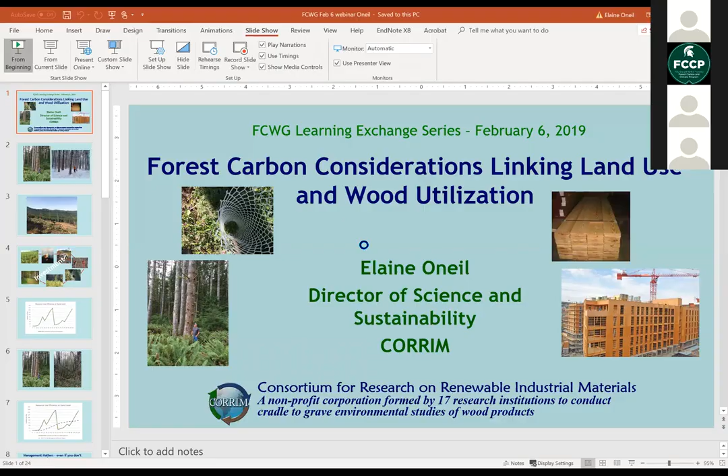Thanks, Lauren, for that introduction. Because I'm on a time limit, I'm going to move directly into the conversation about forest carbon considerations, looking predominantly at the land use forum, which is my area of expertise. I'm going to start with a look at private forest timberland.

Let's look at what it takes to grow a forest and keep it as a forest. I find hardly anyone who doesn't like the forest at this stage. We all love our trees, and we love that they're actively sequestering carbon at this point, maybe less so in the winter picture than the summer one because it's cold outside, which most everyone in the country can agree with. That was me, by the way.

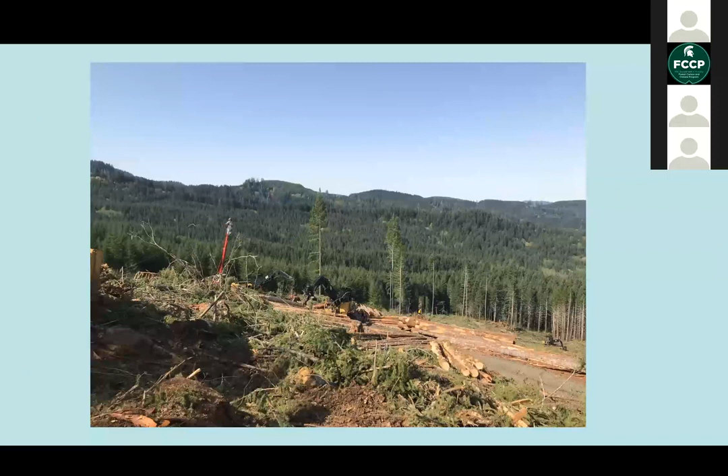Now, except for the landowner, hardly anyone loves the harvest stage, which takes place once every 25 to 50 years over a 2 to 3 week period. I think we tend to forget that what ensures all those trees can continue to grow and sequester carbon is the opportunity for profit and reinvestment.

The investment is not inconsequential, from sowing those seedlings, doing the site prep, planting and protection, to managing that forest for 25 to 50 years. There's a tremendous amount of money, time, and labor involved in regenerating forests and protecting them from all sorts of hazards. Take the example of small forest landowners, the Townsends, putting elk browse protectors on every one of their seedlings and rechecking and replacing them every year until that stand is above browse height.

They don't like this, but I like to call it the diaper phase. It seems to fit because it's a labor of love with high uncertainty regarding returns. Then there's a long wait, sometimes until the next generation inherits their land.

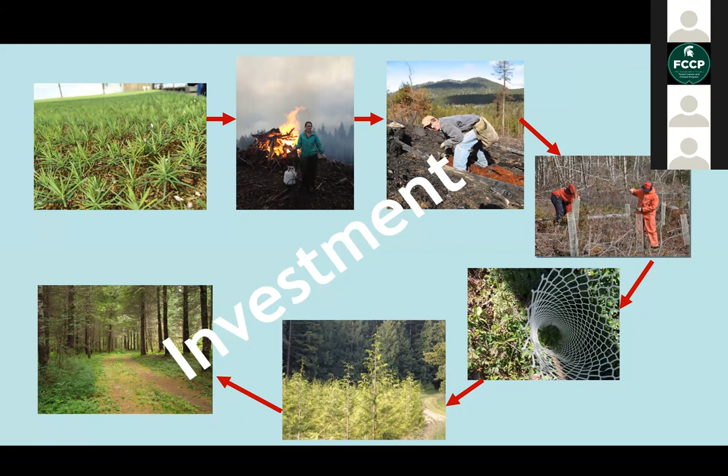Barring a whole host of potential natural disasters, that kind of investment will generally lead to a well-stocked forest stand that can sequester a substantial amount of carbon while it is growing to maturity for the next harvest.

That kind of growth you can see here in carbon in tons per hectare. This just looks at the forest component, not the soils and understory. Once you plant that forest, you start sequestering carbon, and at age 50, in this example for the Pacific Northwest, you're harvesting and then planting a new crop again. That little blip at year 25 is when you're doing a commercial thin to improve the quality of the stand.

So this is 0 to 100 years on the X axis, and carbon in tons per hectare is 0 to 180 on the Y axis. At about 50 years, there are about 160 tons per hectare of carbon sequestered in the trees in that particular stand.

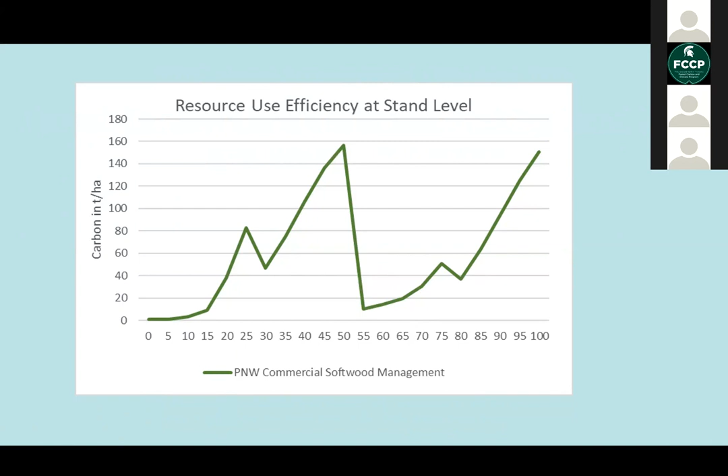The second alternative does not make good use of the site, so from a resource use efficiency standpoint, it's not necessarily a good alternative, but it is the alternative when there isn't that opportunity for investment and recovery of investment through harvest.

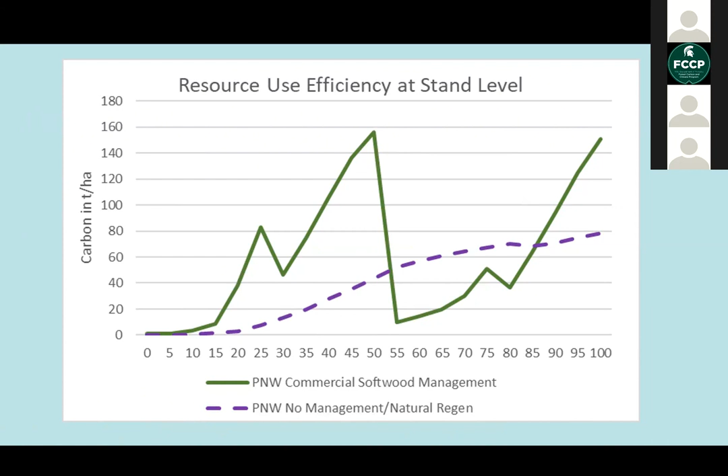Because tree volume is directly correlated to carbon sequestration, the acre that you don't manage doesn't sequester as much carbon either, and it doesn't do it as quickly. That's shown by the comparison of the Pacific Northwest no-management natural regeneration alternative, which you should be able to see as a dotted purple line. There's a substantial difference in the ability for forests to sequester carbon under management versus no management.

In fact, even if the forest is never harvested, failing to invest has significant long-term consequences on the amount of potential carbon that can be sequestered per acre, as noted on the 3 solid lines on the chart here. The black line at the top—my cursor is following that black line—is the managed forest, no-harvest alternative, which would be more akin to that picture of the large Douglas fir.

An unmanaged forest, if you do nothing, you might get regeneration here in the Pacific Northwest—not in all regions, but here you can get regeneration—though it will take quite a bit longer and won't necessarily be as productive. I would say that alder stand is more like this bottom gold line because it's not a fully stocked forest.

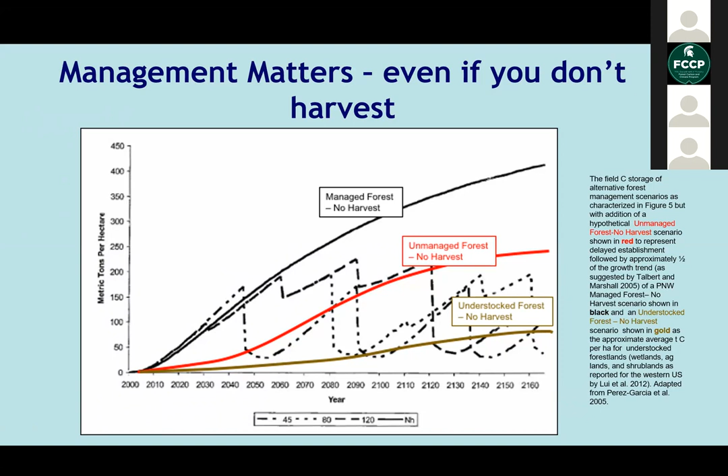Now, these lines represent the average of a number of different references that we've looked at for these comparisons. The first two were modeled within the work that we do.

Now, in terms of management and investment, how big can that difference be? This one, we're changing regions. We're going to the southeast, US Southeast pine plantations.

On that bottom, I found this particularly stunning. In 1940, the annualized yield measured in dry tons per hectare per year on the y-axis was about 1 dry ton per hectare per year. That was just a natural stand. With planting and then the advent of site preparation, fertilization, weed control, and tree improvement, and now they're in that clonal biotech area, you're looking at 13 times more yield, which means 13 times more carbon sequestration.

And then at the same period of time, you have the rotation age dropping dramatically from 50 years to about 18 years. That's that black line flowing down from the left to the right.

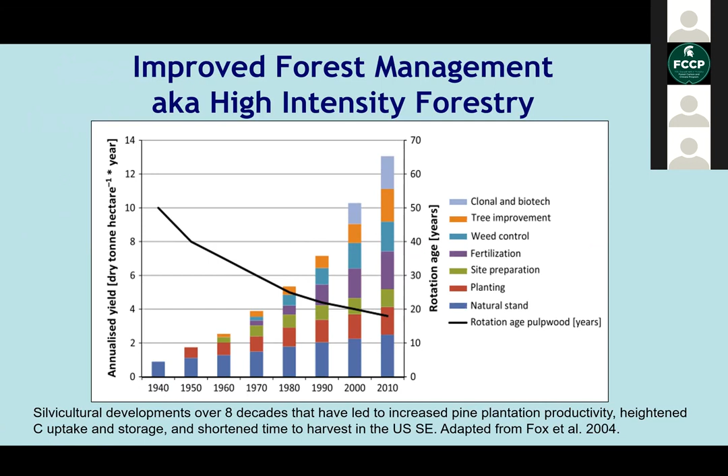Clearly, with investment, we can grow trees bigger, faster, and better, but that investment does come with the expectation of harvest. Now, this is also in the southeast, and now that we have 2017 RPA data, we'll probably update this one.

With that increase in investment, what we've found is that not only is there an increase in efficiency per acre, but also an increase in acres in production.

So what we're seeing is that the land is sustaining its carbon, the carbon volume on the land, while we're continuously removing carbon and putting in for other uses, whether long-lived products or pulp, or currently pulp pellets.

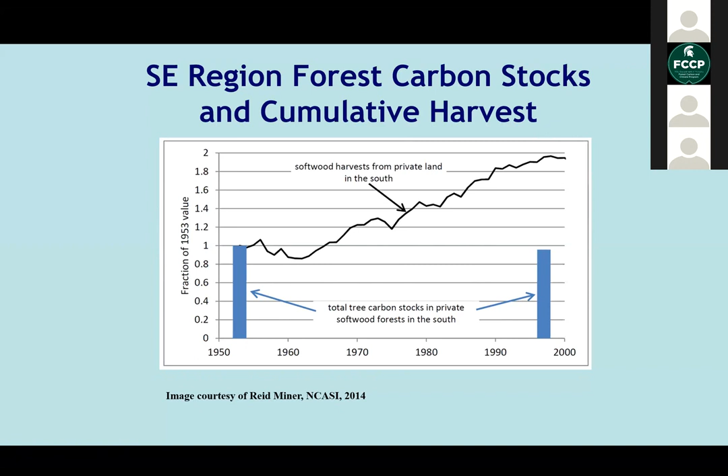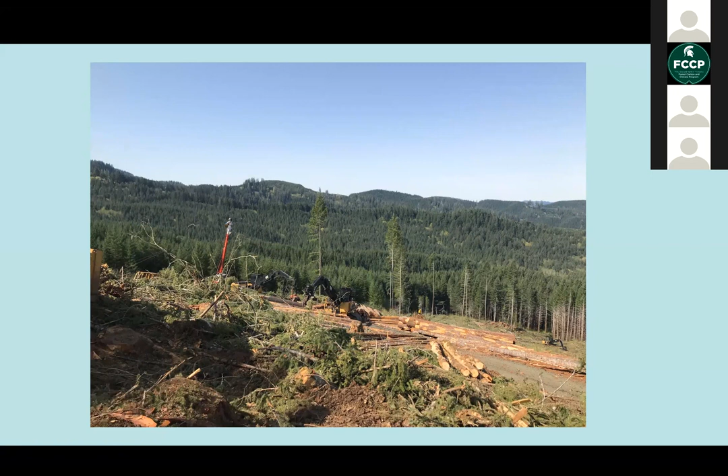Now, I want to go back to that clear cut for a minute, and I want you to look beyond it to the forest land behind it. That particular forest land is all owned by the same landowner that's doing the harvest. There is a myth of the carbon debt that arises because in this harvest scenario, we only look at the clear cut and forget that the land behind it is part of the package deal.

So that example where I talked about the Townsends, they have about, I want to say, 300 acres. And they have a long-term management plan. They know exactly what they're going to do and when they're going to do it. They probably look like the little squiggle, but they're not the only supply to a mill.

And when you want to maintain a milling infrastructure, you basically need that flat line of supply, which means you don't have a carbon debt.

If you're not managing sustainably, then you tend to lose your markets, because there's no way for those mills to continue to operate without a stable supply.

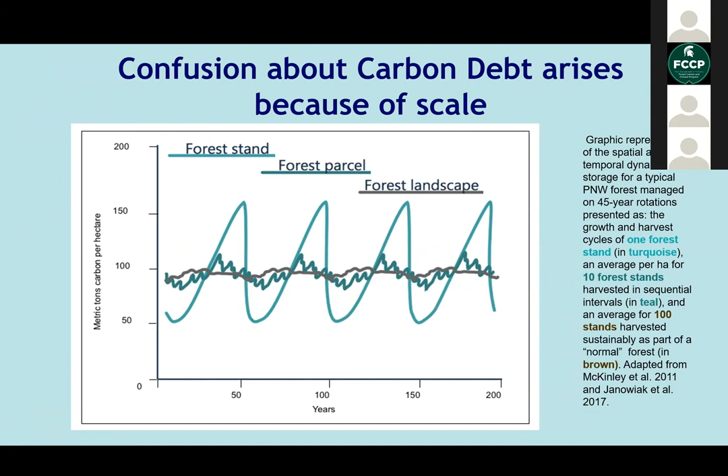When supply dries up, as it has in the western U.S. where the forests are predominantly federal lands, the infrastructure disappears and the opportunity to invest on remaining lands goes with it. And that's been a real unfortunate consequence in the past just about 2.5 decades.

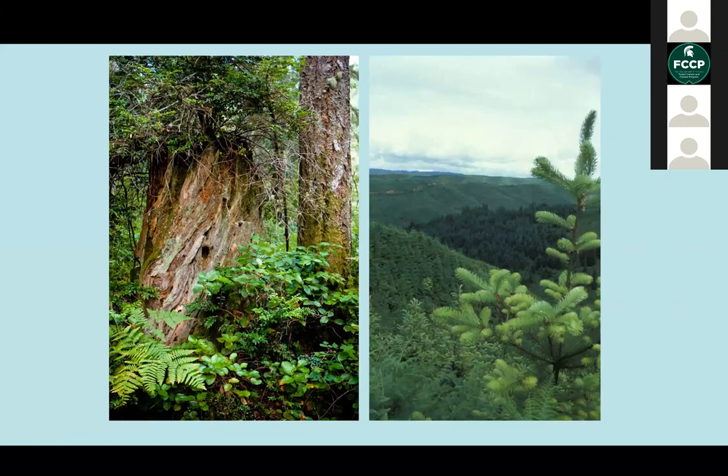This leads to a brief discussion on the difference between old forests and young forests in terms of carbon sequestration. These are a couple of my favorite pictures. I love both of those forests, but they have different consequences when we're talking about forest carbon and how we want to use forest carbon as a mitigation for climate impacts.

In terms of resource use efficiency, if that was the only thing we were measuring, and I'm not saying it is for national forests since they have lots of other purposes for being, but in terms of resource use efficiency, we could say this is not an efficient mechanism for maximizing carbon sequestration from the atmosphere.

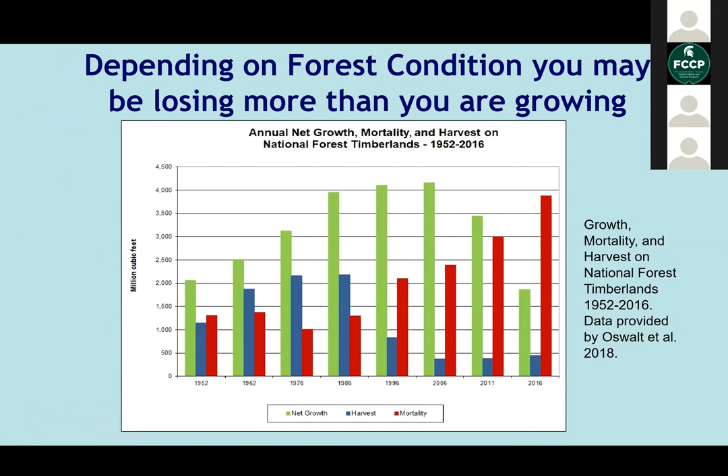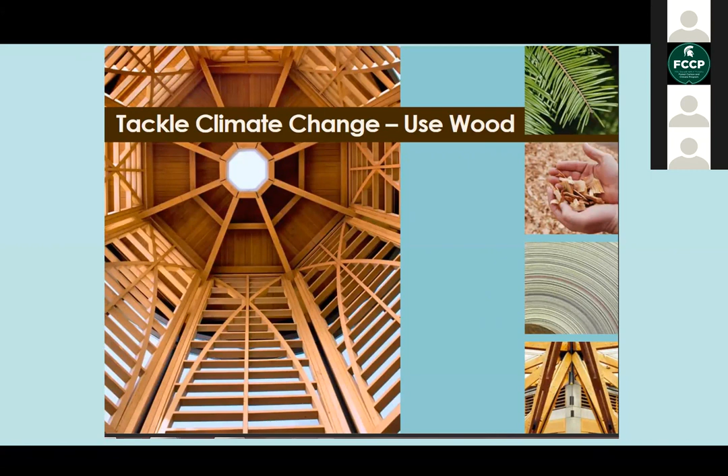We've tracked everything from the time we germinate the seedling and put it in the ground, and we grow it and harvest it and take it to the mill and divvy it up into all these products, and then we start looking at alternatives. A lot of that work has been done, so we have a pretty good idea of where the pluses and minuses are.

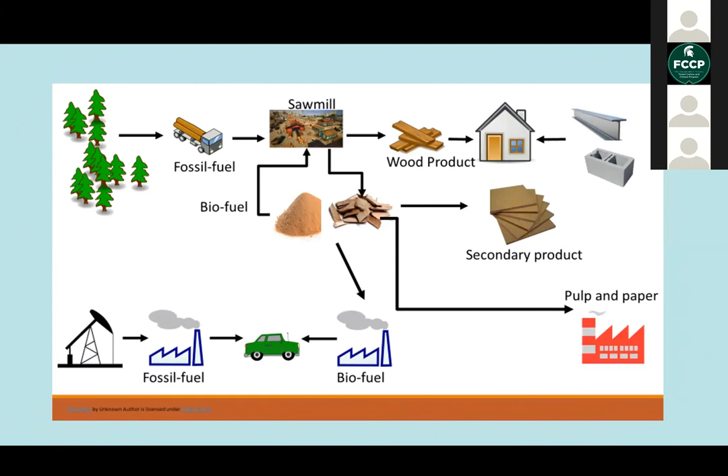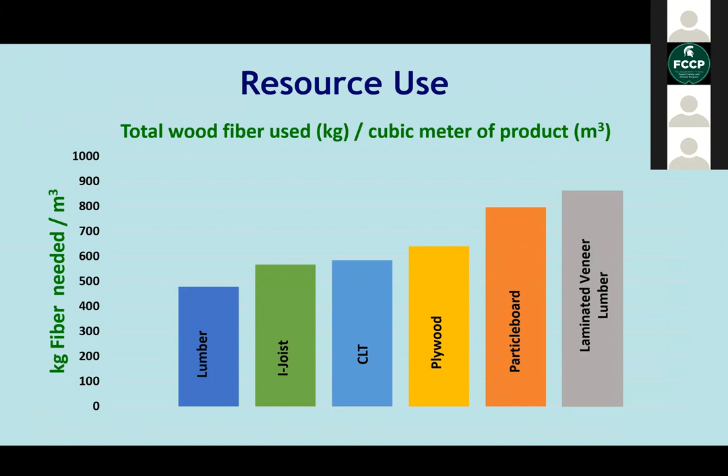Now, I'd say those comparisons are somewhat useful for us academics, and they meet the requirements for LCA because you have to put it on some kind of unit, but they're not as useful as comparing resource use efficiency on what we're calling a functional unit. In this case, our functional unit is a square meter of wall assembly. A square meter of wall serves a function just like a square meter of floor.

Now, if you were noticing in that last chart, there's a bit of jostling around in terms of resource use efficiency per functional unit. You got kilograms of wood fiber per square meter of wall. If you use a steel stud plus plywood, the wood fiber used per square meter is just the plywood. If you have a wood stud plus plywood, you have more fiber used. And if you have CLT, you have an enormous amount of fiber used. So we've come to the conclusion CLT is not a very efficient way to build a wall if you're considering wood fiber used as a resource use efficiency metric.

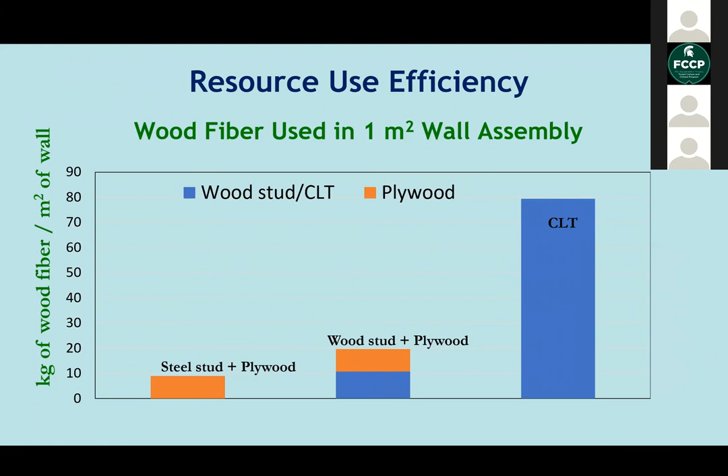But on the flip side, because it's not very efficient from a resource use efficiency standpoint, it does store a tremendous amount of carbon relative to other alternatives. Here it's compared lumber to steel to concrete block to CLT, again looking at carbon stored in that wall.

So if part of your goal as a builder is to have a building that serves as a large carbon sink, then something like cross-laminated timber or other mass timber products have some significant pluses over conventional construction.

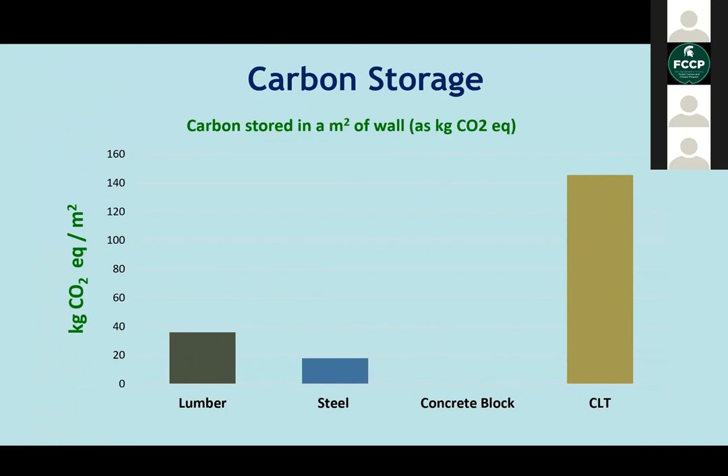And finally, I want to say where mass timber really shines in terms of carbon footprint is when it can replace something like a reinforced concrete wall, because on a net basis it stores carbon emissions rather than releasing them. That's shown in this particular chart, where zero would be a net zero building where you're neither emitting nor storing any carbon dioxide in that square meter of wall. Everything to the negative side is actually storing more carbon dioxide than emitted in the production of it, and everything to the right is emitting more carbon dioxide than is stored in the final product.

This is just one example of a comparative analysis. It builds step by step from the point of the seedling until the wood product enters the building as part of a wall.

I would say that many more of these kinds of comparative analysis are needed, not just on the functional unit basis, but on the whole building basis, so that we can find the highest leverage for what is essentially a scarce natural resource, sustainably produced wood. And with that, I wanted to pass this on to George, because I think he has the other part of this story that I'm very much looking forward to hearing.

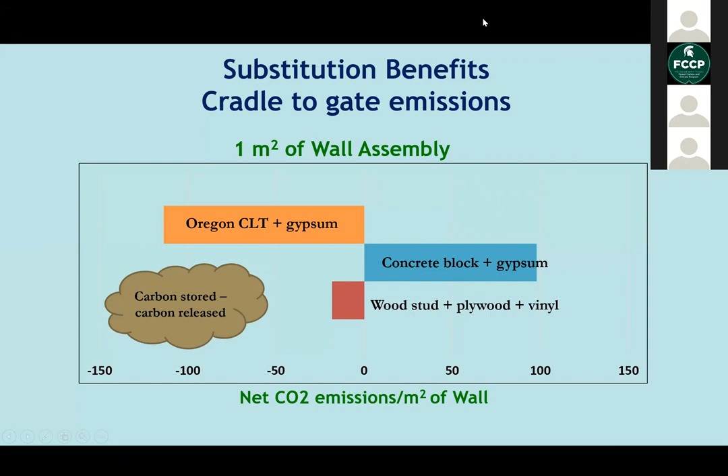Yep, I just need to, oh, there we go, sorry. I thought I had to get screen sharing given to me. I apologize.

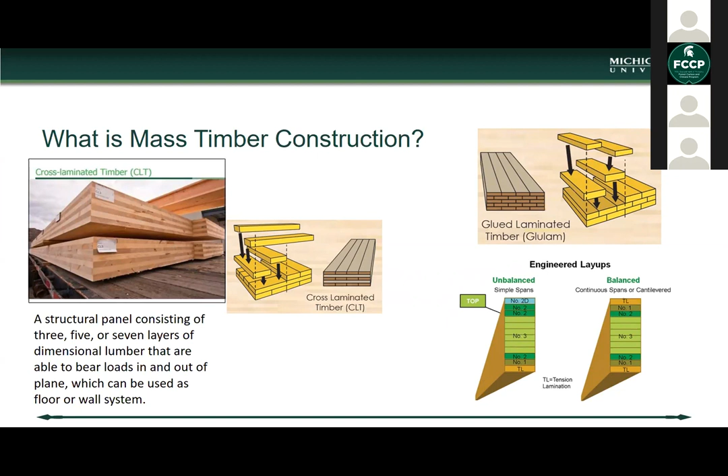This was built within the last 2 years and is emblematic of the fact that there are designers and contractors in the United States moving forward with mass timber structures, even without a current code structure that supports the easy adoption of this technique.

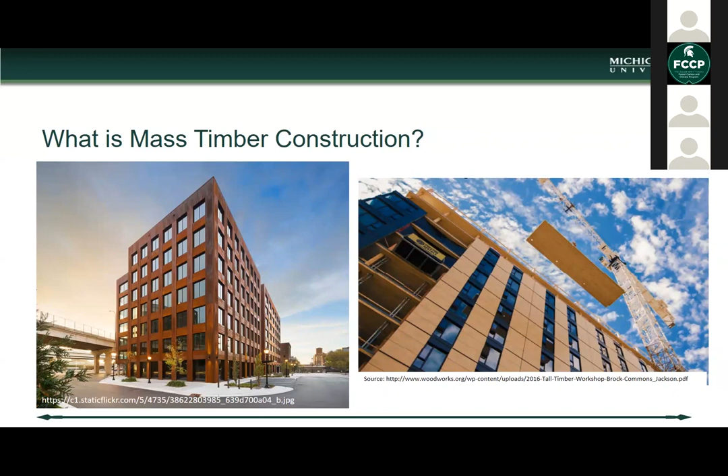And so it's possible with CLT. The final picture that I'll show, just to orient you with a project—and we'll talk a little more about this project and Brock Commons.

This project is Candlewood Suites. It's a hotel, a national hotel chain here in the US. This hotel building was built on the site of Redstone Arsenal, which is an Army base in Alabama. This was an all-CLT project, the first one that Lend-Lease constructed purely from CLT. There was significant interest in the blast resistance properties of CLT when this project was put in, because any structures on a military installation have to meet force protection requirements.

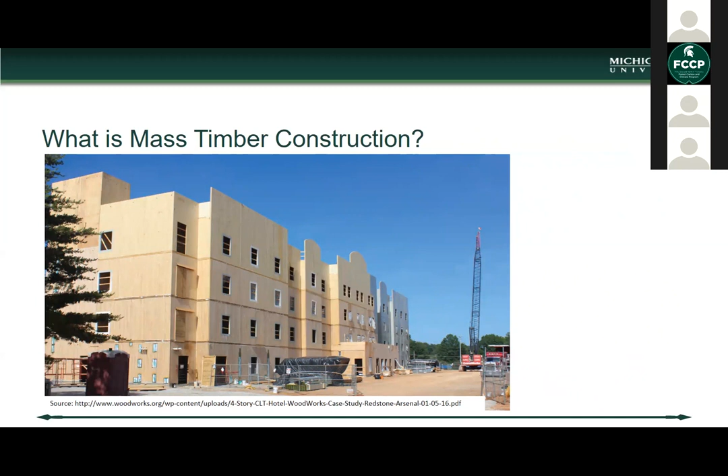But my interest in this project has been some of the metrics around the time and cost considerations of the construction.

So moving into those time and cost benefits, what we find is that mass timber buildings typically feature time and cost savings that arise from a couple of areas. Those areas include the fact that the panels tend to be lighter with the same or even a higher strength to weight ratio than that of reinforced concrete. So the size of the crew that's used to erect these structures can often be reduced—there's a labor savings.

The size of the crane needed to hoist these panels into place often can also be downsized. Additionally, the time to construct tends to be quicker because of the size and relative lightness of the panels. So there are indirect cost savings on the construction side as well, involving payment for items that exist on a recurring monthly basis—temporary facilities, equipment rental, facility rental, overhead costs, things like that.

There's some potential reduction in foundation size as well, due to the fact that you've got a lighter superstructure, so there's less load for that foundation to support, and so smaller, lighter foundations are also possible.

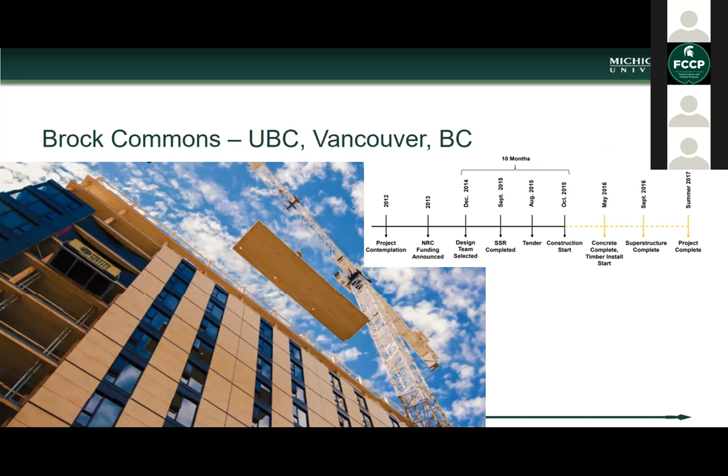So if we look specifically at two case studies, starting with Brock Commons in Vancouver, British Columbia, I'll focus your attention on the fact that the concrete podium portion of the structure was complete and the timber installation began in May of 2016—again, this is an 18-story building. The superstructure was complete by September of 2016, so an overall 4-month timeline to get that entire superstructure up. This is not uncommon performance for what's seen with CLT.

The question that often comes up is, how does CLT price out compared to reinforced concrete or steel? The material tends to be more expensive, but again, because of the time saving, you end up—this was a comparison prototype—with a per square foot price that basically comes right in line.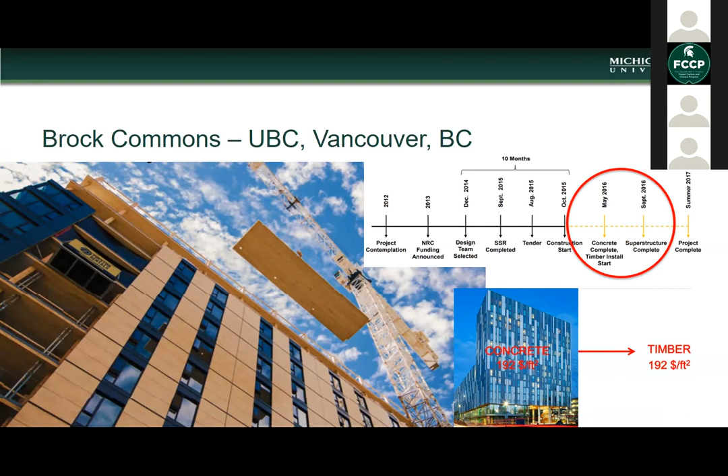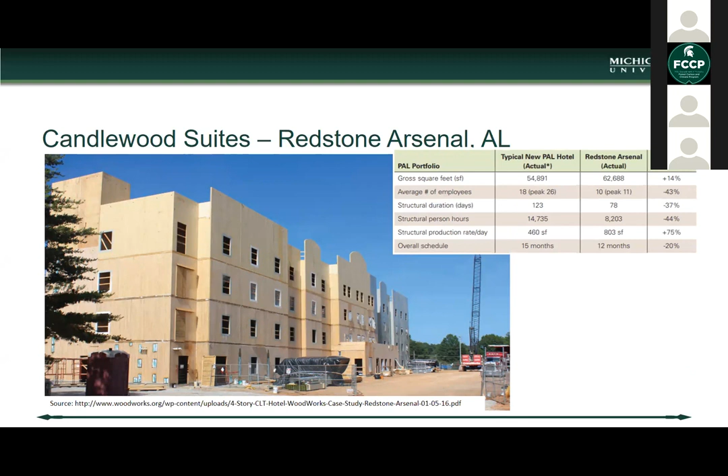So in this case, Brock Commons came in directly on target with the same square footage price for a like concrete building. In the case of Candlewood Suites, I want to talk about time reduction, because that's where we get into some of the carbon related issues.

On the time reduction side, you can see on the right-hand side of that chart that you had a smaller crew, and the structural duration—the erection of the actual superstructure of the building—was reduced from 123 to 78 days. The number of person-hours to complete the structure were greatly reduced.

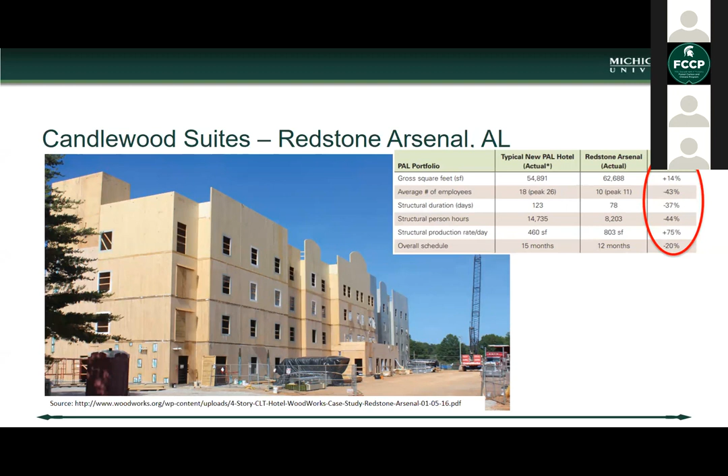You had a higher structural production rate per day, and overall the project saved 3 months in the overall schedule. So there's some interest and questions about how changing the process could have a positive impact on the project's carbon budget.

So we'll switch gears into that now, and I just want to look at a hypothetical $1 million worth of value in the U.S. commercial building industry. We're looking at all commercial buildings in the United States, and some of the life cycle emissions that go along with the completion of that much economic activity.

This is the Economic Input-Output Life Cycle Assessment Framework from Carnegie Mellon University. We find that for every $1 million of U.S. commercial building construction activity, we have about 414 metric tons of CO2 equivalent being released. You can see the breakdown in the chart of where the sources of those emissions are coming from.

The structure itself is responsible for, of course, the greatest proportion of that, and then we break down from there with electricity consumption and on. But where I really want to focus our attention is on the emissions that result from cement production and iron, steel, and ferroalloy products—the cement going into the concrete to generate reinforced concrete for these buildings, and what's going into the production of either structural steel or rebar for that reinforced concrete.

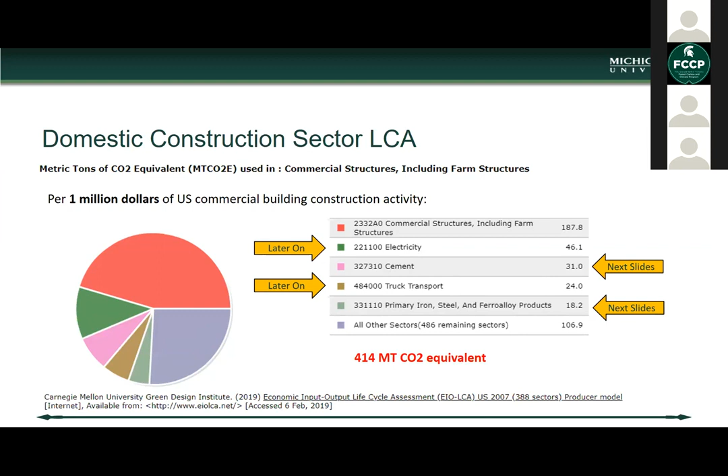Similarly, and I'll get to this point a little later in the presentation, I want to look at electricity and truck transport pieces of that emissions budget as well. We need to be careful about scale as we go through these numbers, but we'll take a look at how electricity and truck transport impacts may be mitigated as well.

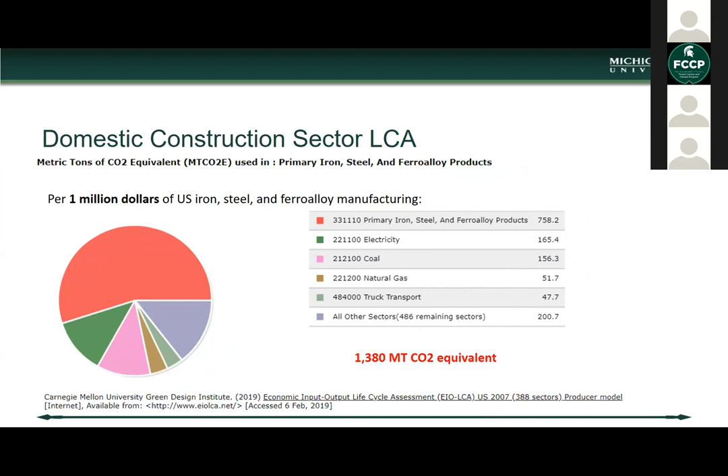So we'll start with conventional materials, and again we're just going to take $1 million as our hypothetical amount of activity. This is $1 million worth of steel. We find that generating that $1 million worth of steel in the US produces about 1,400 metric tons of CO2 equivalent. If we go into ready mix concrete, we find that we're getting about 2,240 metric tons of CO2 equivalent through that amount of activity.

With ready mix concrete, the vast majority—and you can see the numbers here, this is an order of magnitude difference—is coming from cement production. And this is nothing new; we've known for years that cement production tends to be the place where we see the greatest use of energy and the greatest potential for greenhouse gas emissions from the concrete industry.

So we've taken steps within our industry to try to replace some of that cement with things like fly ash and other materials that reduce that overall burden. But this is still what we're looking at per $1 million of ready-mix concrete manufacturing.

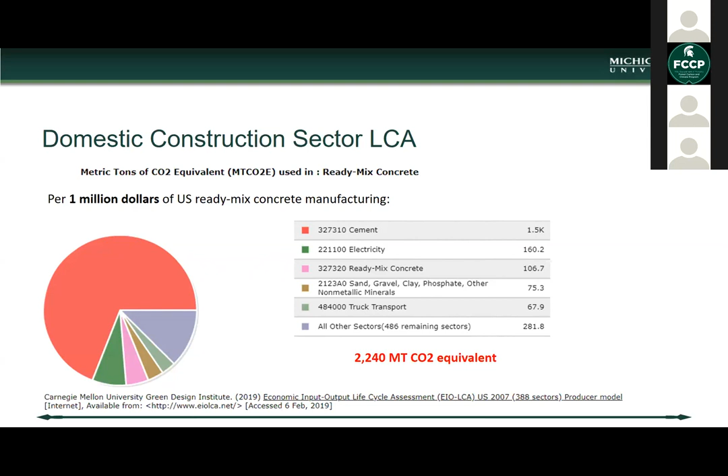So if we flip over now to some of the alternatives, unfortunately we don't yet track mass timber as its own industry segment, and this EIO-LCA model from Carnegie Mellon tracks along NAICS codes. So if there's no North American Industry Classification System code, you have to find analogs. I used veneer plywood and engineered wood as my analog, and found that for $1 million of producing that material, we're at about 442 metric tons of CO2 equivalent.

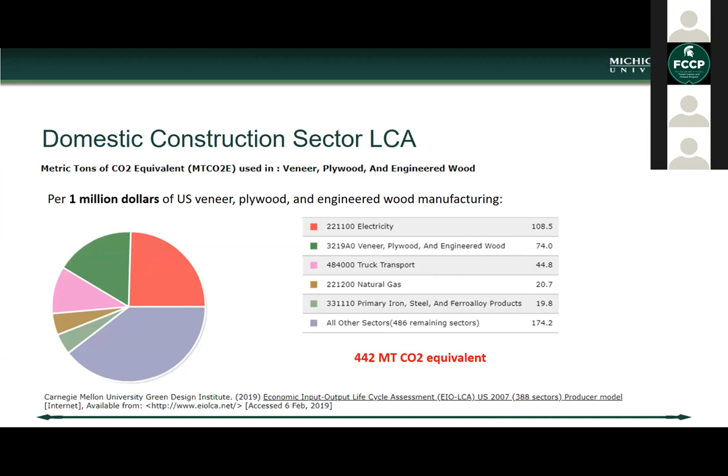So in terms of the scale and order of magnitude of these numbers, this supports some of what we've seen in terms of looking at the overall carbon budget for these buildings once they've been constructed. But now let's look at vehicle usage during the construction process, and we'll use Redstone Arsenal as an example.

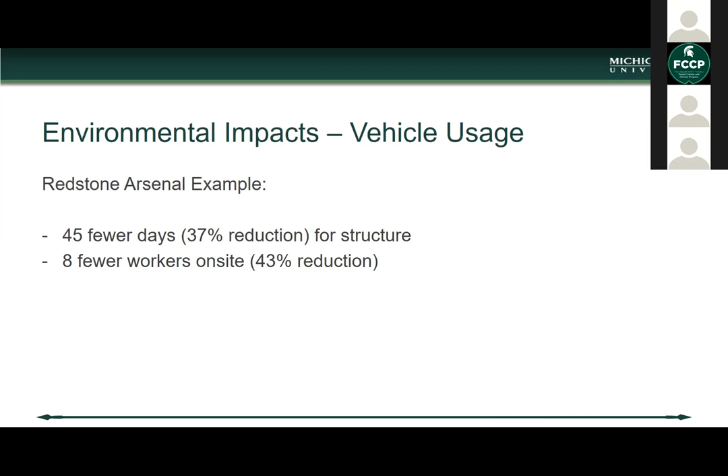We know that we had 45 fewer days used for the structure, and 8 fewer workers on site. We can look at the tiered emission standards brought into play in the US for vehicles. Basically, once you get above a 135 kilowatt engine, the tier 3 emission standards from 2006 capped all of those engines at 3.5 grams of carbon monoxide per kilowatt hour.

So we can look at these reductions and say, okay, in a scenario where we're not sure exactly what has been emitted or not from one of these buildings, how can we do some calculation to tell us what the impact of less construction time, a smaller crew, and less crane utilization might be on the project's carbon budget?

And what we find at the very, very minimal end is that we might be reducing about 1,000th of a metric ton of carbon monoxide from cranes. And that's before we think about downsizing cranes, because there are some cranes with a small enough engine to get below that 135 kilowatt sizing, so you'd actually be in a different emissions category under those tier 3 standards.

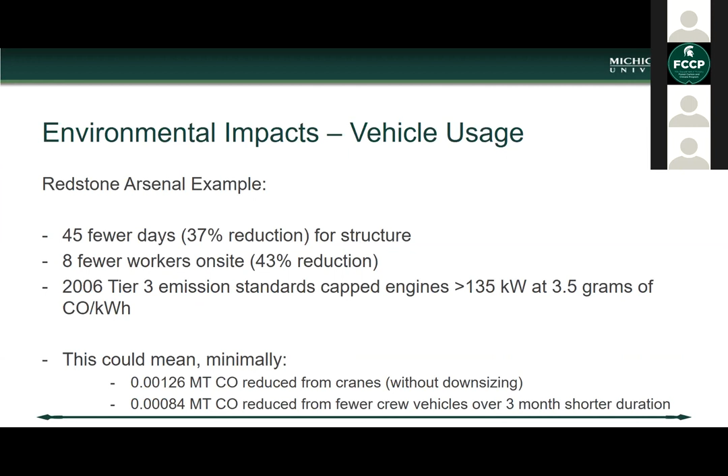And then you see we reduce some carbon again from having fewer crew vehicles over that 3-month shorter project duration. So these are not large contributions when you consider that $1 million worth of concrete is giving us over 2,000 metric tons of carbon equivalent. But still, a contribution to the project carbon budget nonetheless.

The other issue to consider is transportation, because one problem with mass timber construction in the United States right now is that we don't have a large network of cross-laminated timber manufacturing facilities. So for the Redstone Arsenal project in Alabama, they were sourcing CLT panels from Nordic Structures in Quebec, quite a ways into northern Quebec at that.

So they had about a 1,500-mile trip to bring those panels. And so I wanted to look at how transportation of materials plays into the carbon budget for those materials. We started with 1 cubic yard of site cast concrete.

So ready mix concrete that you bring to your site and cast on site. In the case of Redstone Arsenal, there's a ready mix plant 11 miles away from the building location, and that's fairly common in most locations in the United States. Most places are within a reasonable distance of a ready mix plant, otherwise you couldn't get the ready mix to your site before it started to cure.

So for 1 cubic yard of site cast concrete, you don't even generate a bar on this scale for CO2 equivalent in terms of metric tons. And that 1 cubic yard of site cast concrete comes out to about 4,050 pounds.

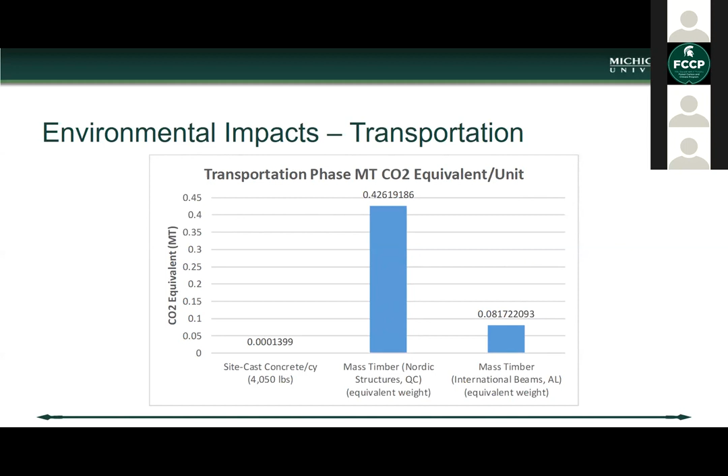I do want to take a couple of minutes to talk about changing how we might look at mass timber, and where some of the carbon budget for CLT and other mass timber products may come from. So we're looking at the possibility of using salvaged lumber to manufacture the product.

The takeaway here is that in North America, we don't really do very much in terms of recycling and reusing lumber. Most of it ends up in the landfill, incineration, or downcycling, so the carbon budget would be perceived as negative at that point.

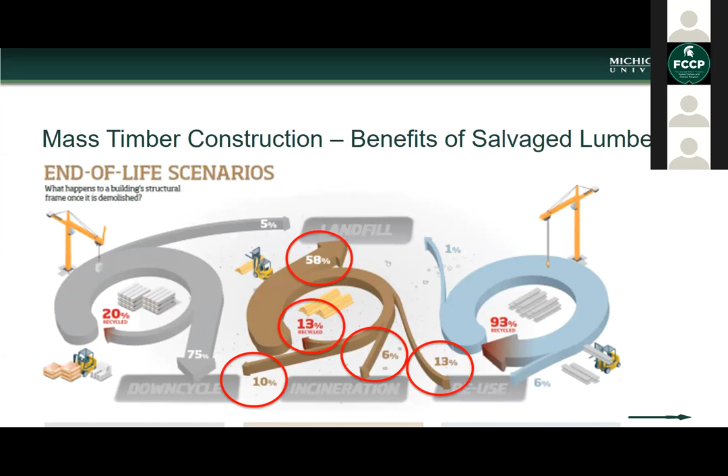So that motivated us to do a study looking at salvaged, reclaimed lumber coming out of old homes in Michigan, and whether or not that could be put into production for CLT or glulam.

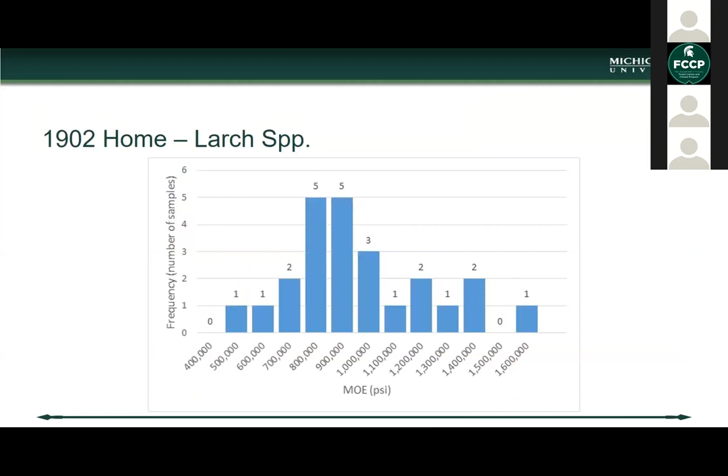I won't bore you with the details on these slides, other than to tell you that we found 84% of our samples from one specific home that we tested passed the E3 stress class, which is the most common entry classification for lumber going into the manufacture of CLT.

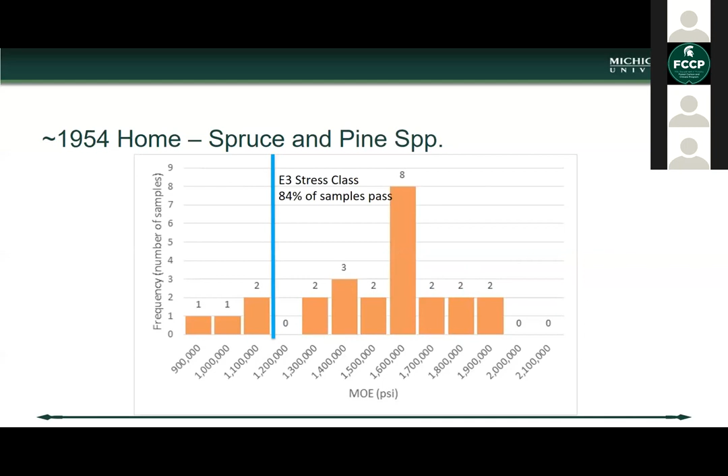So 84% of our samples could pass going into the CLT manufacturing process. So then we said, okay, what does that mean if we could take a house worth of lumber and turn it into CLT? What would that mean for carbon budgets? How would we now change our project carbon budget by accounting for carbon in other ways?

On the left-hand side of this slide is what happens when you landfill 8.6 tons of wood, which is about what we find in an average house in mid-Michigan, versus what would happen if you could put 5 tons of that 8.6 into source reduction—using it to replace virgin material in the manufacture of CLT or glulam. If you still had some recycling and some potential landfilling and combustion for material not of good enough quality to be reused structurally, per home you would be saving about 6 metric tons of CO2 equivalent, which is about the annual emission from one passenger vehicle.

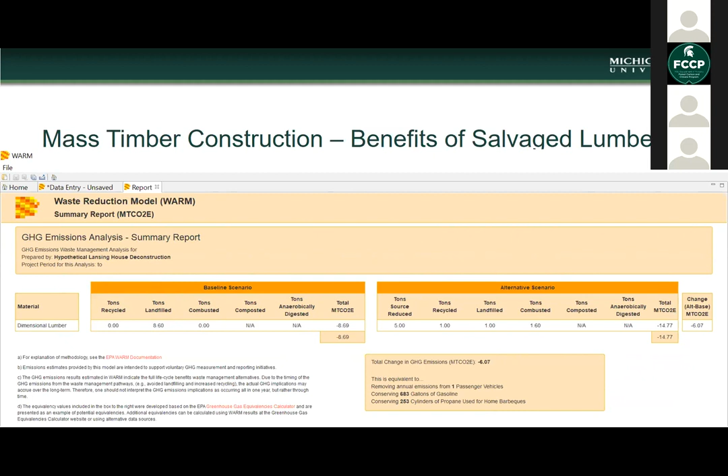You can read the rest of the impacts, but just hold on to one passenger vehicle, since that's the easiest to remember for the next slide, because we don't just have one house that needs to be dealt with—it's abandoned in Michigan.

We have 226,000 of them in Michigan. So if we could start putting that material into productive use, you get a sense of where the scale of this could go as we think differently about how we source material and look at this as part of the overall carbon budget and carbon management strategy—both in terms of virgin timber and salvage material that would otherwise go to the landfill and produce a net release of carbon.

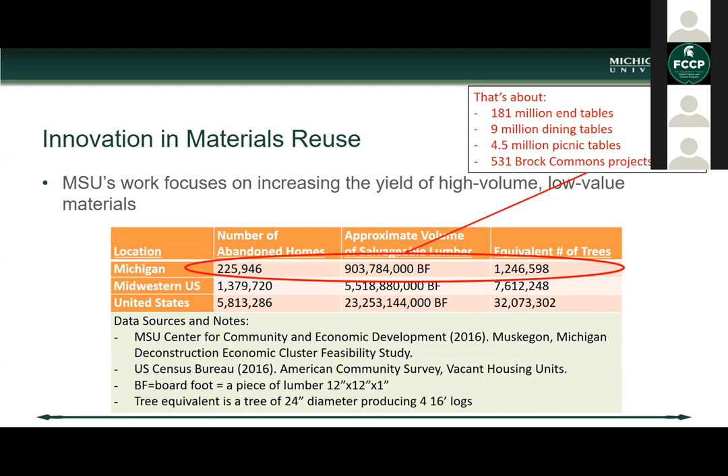The point is, we're probably not going to be able to salvage all of it, which is why most of it goes to the landfill and becomes a source for atmospheric carbon. But you could take that material and manufacture 531 new Brock Commons buildings—again, I'm not saying that's what we're going to do, but I want to start changing some thinking about how we might rethink handling this material.

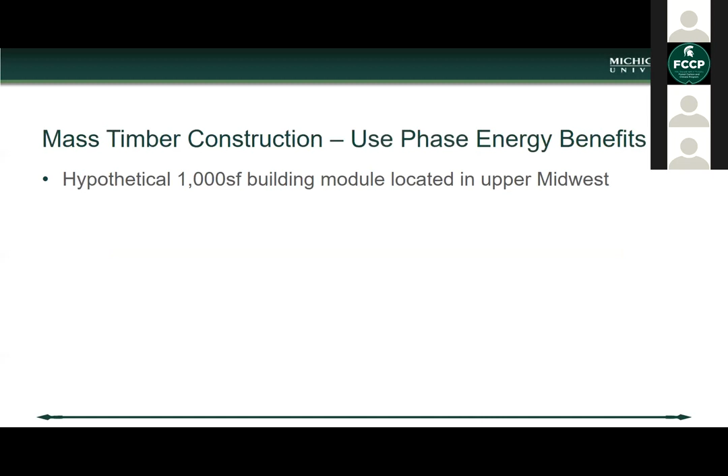I'll close with a final slide looking at use-phase energy benefits in mass timber construction. We're doing a bit of work now on a new project being developed where we took a hypothetical 1,000 square foot building module. This is for a high-rise mass timber building located in the upper Midwest, but they're doing it in 1,000 square foot modules. So we took one module.

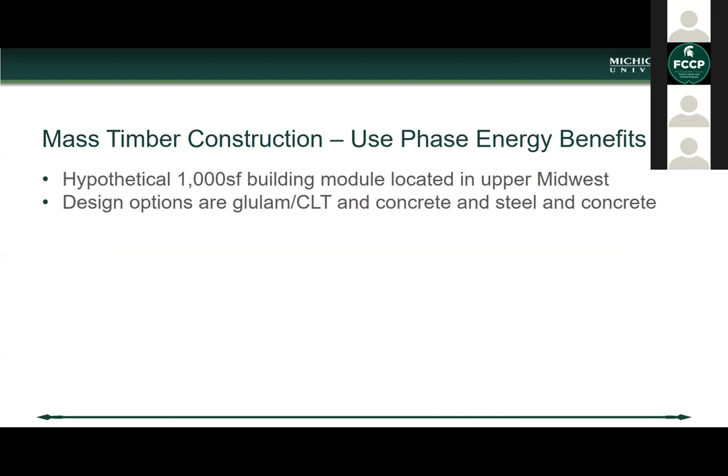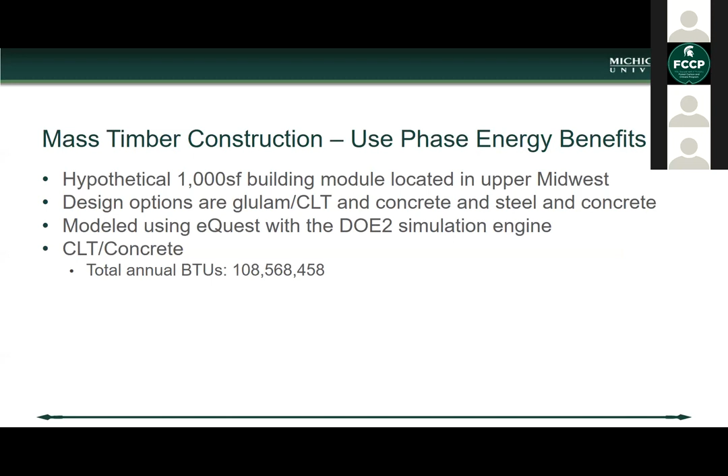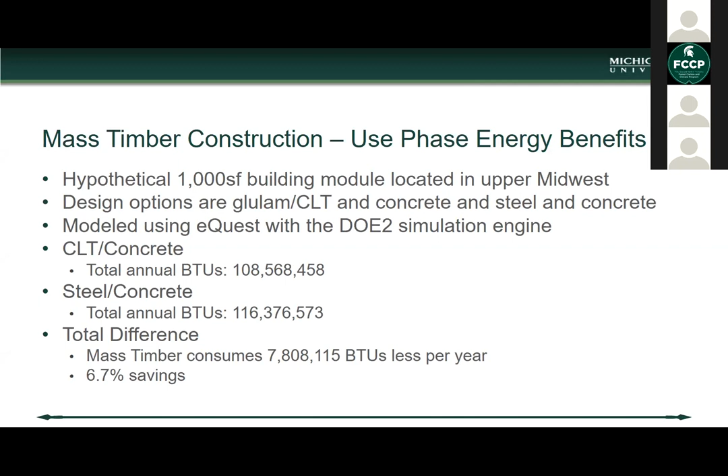Design options were either glulam with CLT and concrete floor and roof decks, or a steel frame with concrete floor and roof decks. We modeled that module using eQuest with the DOE2 energy simulation engine. Basically, we believe on an annual basis we would see about 7% savings in our energy budget from that building. Given our location in the upper Midwest, the majority of those electricity BTUs are coming from coal-fired power plants, so again we're looking at an additional carbon benefit to the project budget beyond just the material itself, thinking more broadly about where these benefits come from.

Where we're going with this for the future: we are working on a time and cost development tool, funded by the Forest Service right now. I bring that up because if we have a better handle on the time piece especially, we can connect it to development of a full LCA model for mass timber building prototypes. Right now we really can't get to that point, but we'd like to. The first step is getting that time tool fully developed, then moving into LCA model development for those building prototypes.

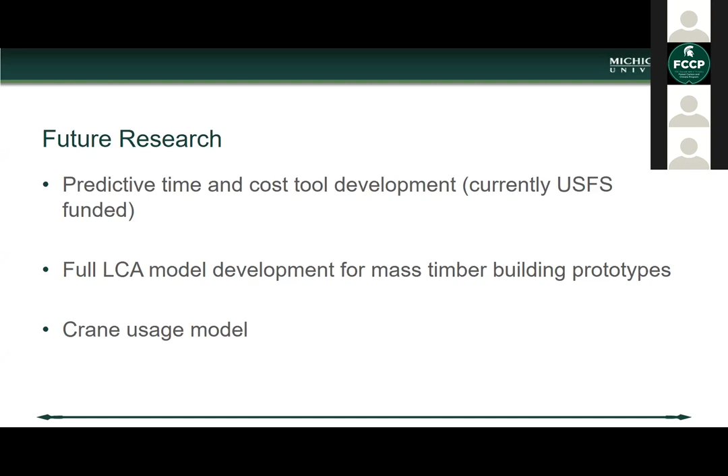One piece we're particularly interested in is the crane usage model—what those fugitive emissions and the carbon budget look like when you change crane usage, both in terms of the hours the crane is running and the size of the crane required for the project being built.